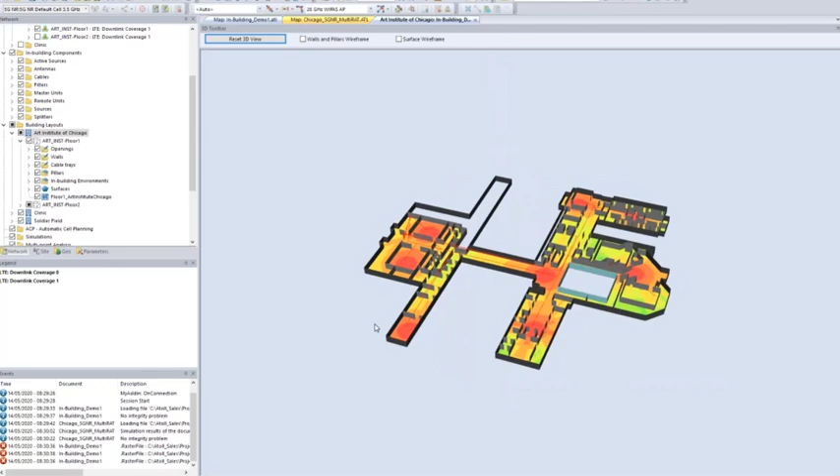That you would like to show and hide.

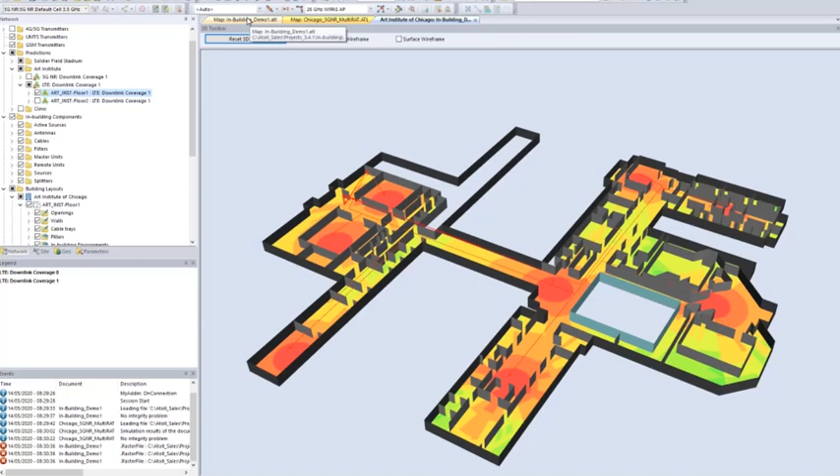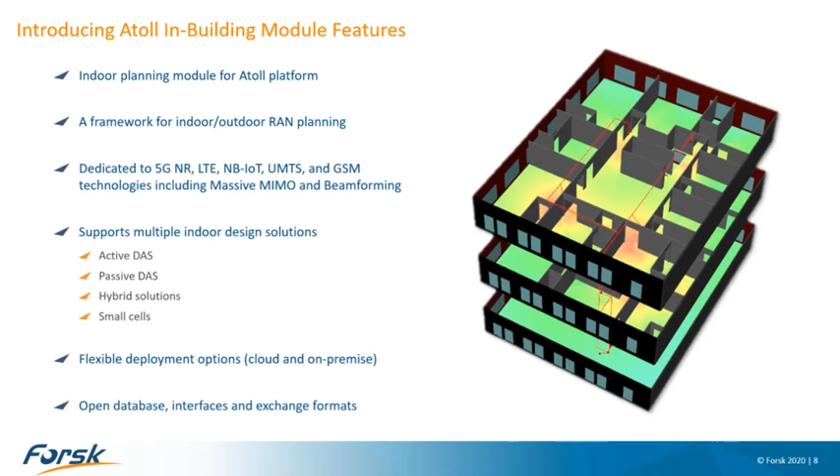When designing the indoor solutions, Atoll InBuilding helps you take into account real-life constraints such as propagation, the EMF exposure norms, the installation constraints, and many others.

As your project is taking shape, the Atoll InBuilding module will enable you to create reports and bill of materials.

So just to quickly show you an example, here I have this building with the doors. You take the coverage from the network, and then, as in this particular case, you can spot the areas where you have low coverage, and then start building your indoor solution.

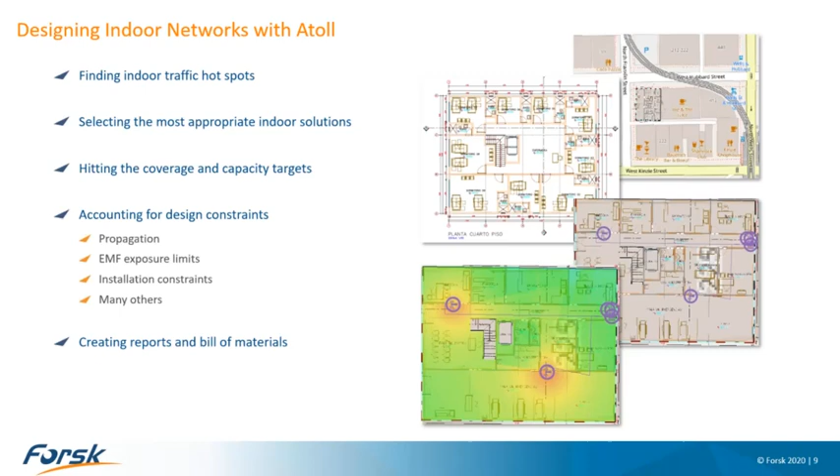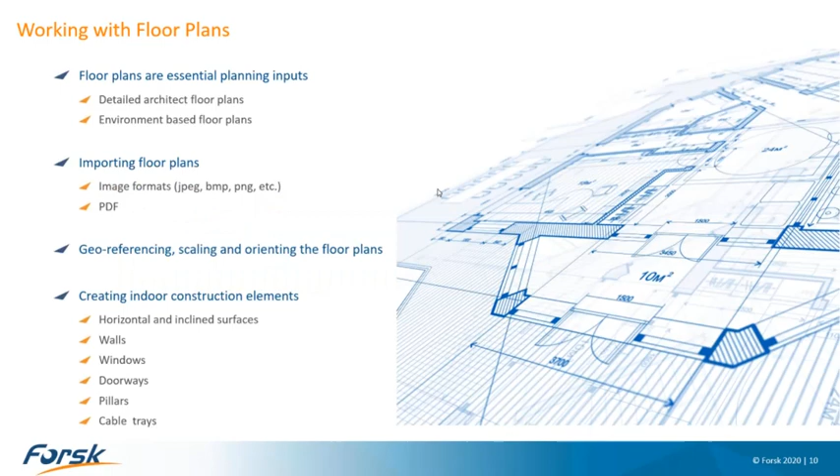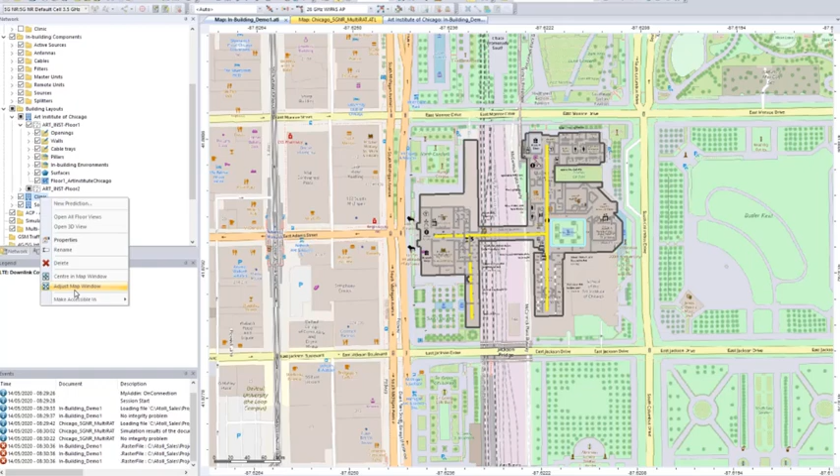Well, let me show you a quick example. I'm going to switch to a particular area. Here I have already a project, but let's do it on the neighbor building from scratch.

So what I'm going to do now is import this directly into the app. I just need to draw, then retrieve. As you can see, I have retrieved a particular building from OpenStreetMap.

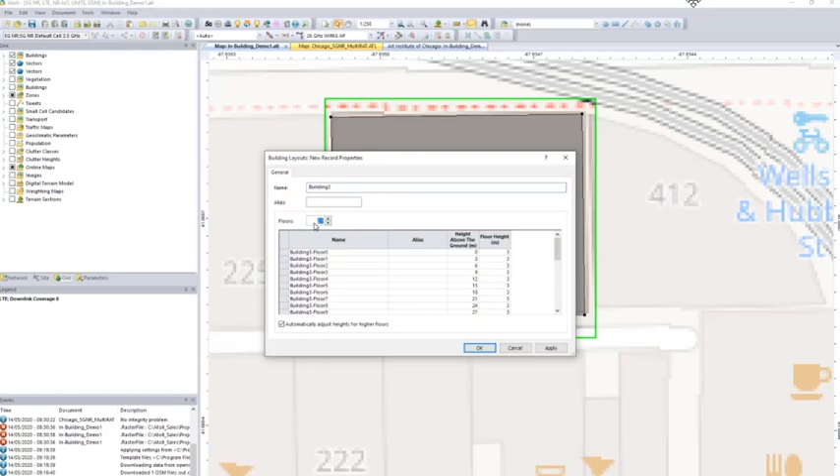What I can do is create my InBuilding project for this building. So now, under the building layouts folder, you'll find your building with all 3 floors, and you can start designing your in-building network.

So let's take floor 1. I'll open the floor view. Here now I can create walls, and I can create surfaces. Let's say I will create a surface for the floor, quickly, like that.

Okay, then what I need now is a floor plan. So let's import the floor plan. I add a plan, here, the floor plan. And I have the building shape, so I need to map the floor plan to this building shape.

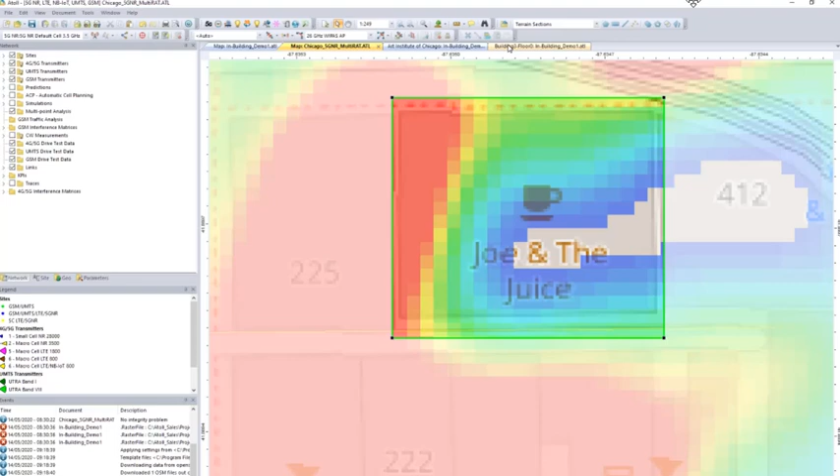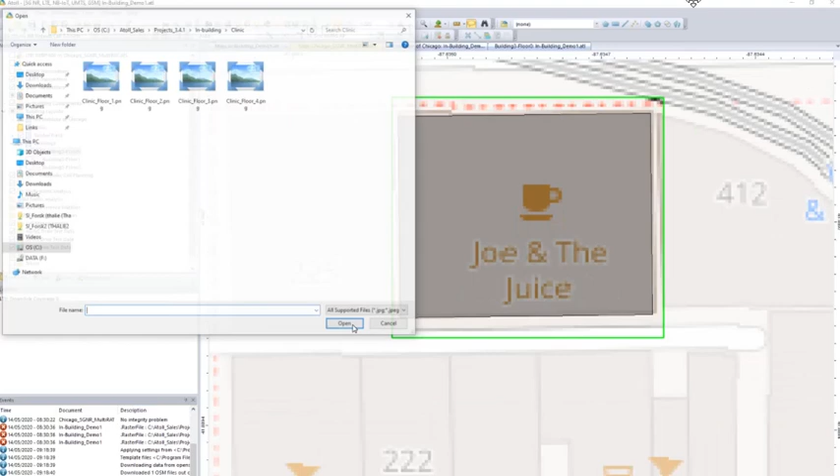Atoll will use this 3-point method to actually match the floor. So what I need is to select the corners that match the building. Sorry, that messed up my import a bit, so let me do it again. Second point, and the third one.

Okay, so now I have my floor plan, and I can start drawing the walls. Let's select a straight concrete wall and do it like that. Another one like that, another one like that, and let's draw some intermediary walls.

Now I can add some doors. Here I have a door, second, third, and let's add this one. I can also add a window, so let's add a window. Okay, so now I have my floor plan, and I can build my indoor solution.

After importing the floor plans, we need to plan our equipment. Atoll InBuilding supports passive, active, and auxiliary components. Passive components include antennas, cables, connectors, splitters, combiners, and other types of equipment, and you can even add your own type of equipment. Active components include master units, extension units, remote units, repeaters, and amplifiers.

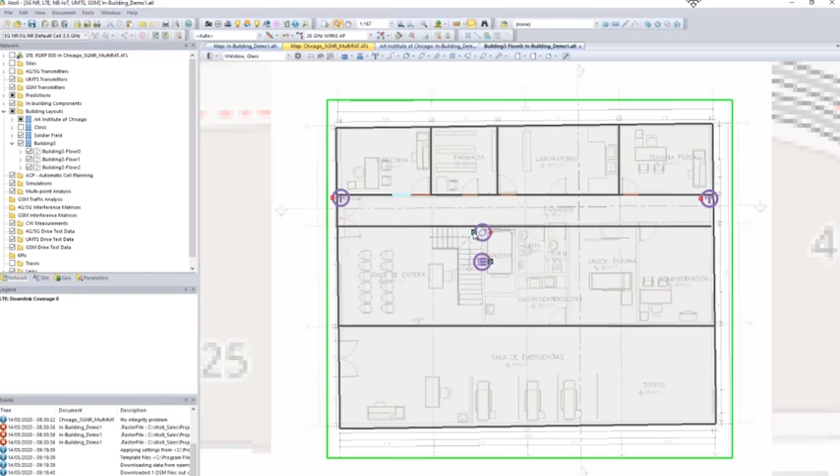So if we go back to our project, I can start building my network. Let's create a source, then I'll add a splitter, then add a couple of antennas, one here and one here. Now I just need to connect them: I'll connect my source to my splitter, and connect them to my antennas, and the second antenna. Okay, so here it is.

And now to make it neat, what I'm going to do is add a cable tray. Let's say I'll add a cable tray, and now I'll route automatically my connections, my cables, through the cable tray—first one, and then the second one.

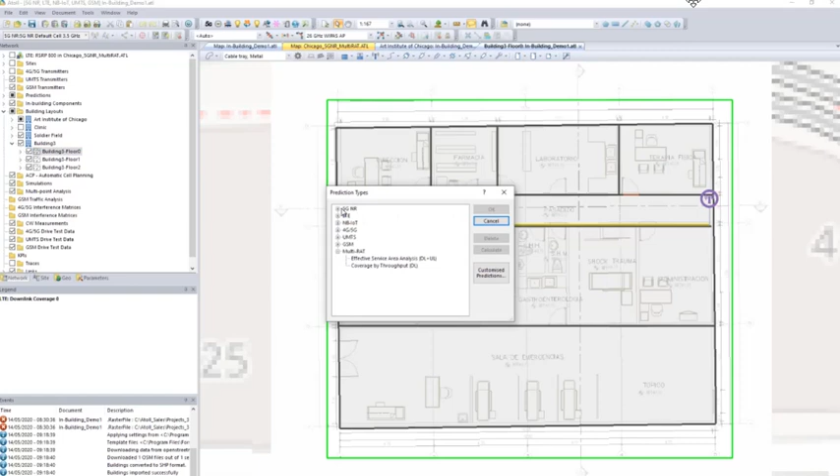So I've built my project, and what I can do now is make coverage calculations. Let's create a new prediction, take, let's say, downlink coverage, and then run the calculations. Okay, so with equipment installed, I have my coverage, and I can start studying my InBuilding project.

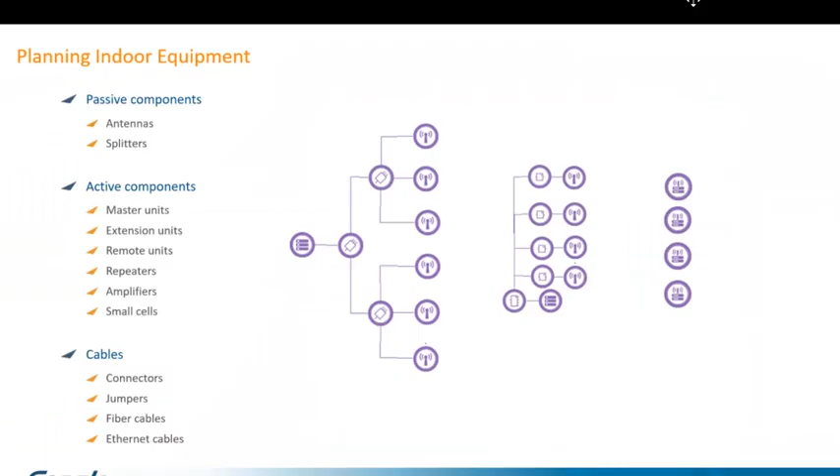Desire is to get the coverage right. To help you with this, we provide two types of propagation models. Both of them are ultra-high precision dedicated indoor propagation models, which feature cross-floor propagation.

The first one is ray tracing multi-wall propagation. It actually uses ray tracing techniques and can model reflections and through-wall losses. It also has the propagation characteristic of material type and automatic calibration using CW walk test data.

The ITU 1238 propagation model is an environment-based indoor model featuring user-definable losses. Propagation models, you find them in the Atoll propagation model library. So here you have the ITU-based propagation model. Here, for different frequencies, you can define propagation.

Let's look at the multi-wall model. So here, also frequency, wall and for other walls. You can also activate the ray tracing method propagation.

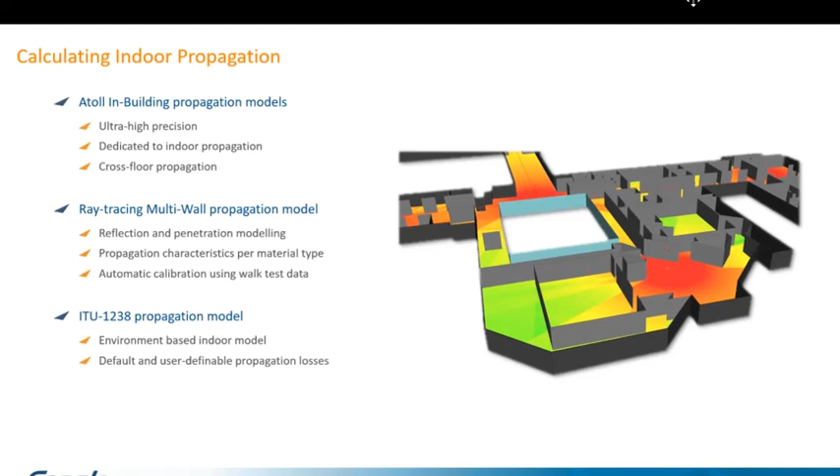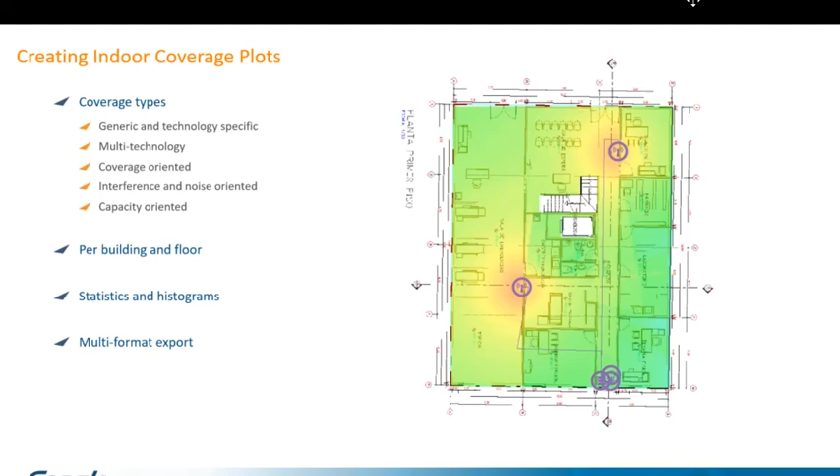Technology plots are provided by several technologies. Plots are grouped in coverage-oriented, interference. Plots can be created. You can run histograms, calculated plots, and the resulting plots can be exported to multi-format vector and raster files.

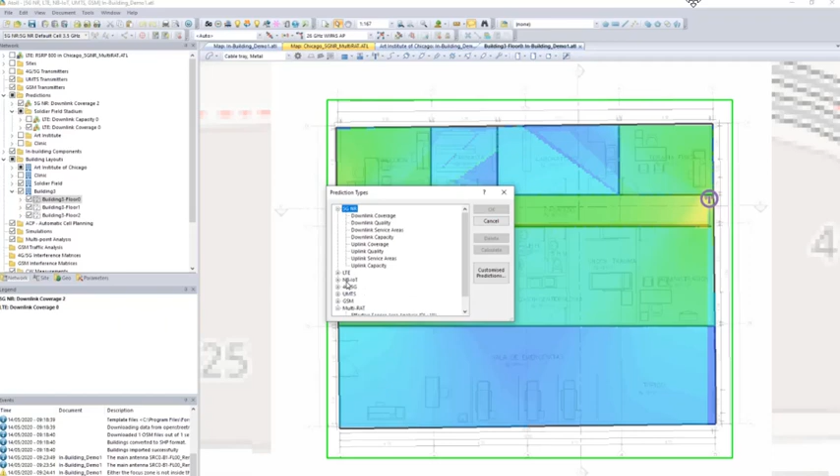Let me go back to Atoll. Here under the prediction folders, you see I have several examples. I have the coverage plot that we just created. When you create a new coverage plot, you add a new prediction, and here are all the technologies and different types of coverage plots, so coverage quality, service area, capacity.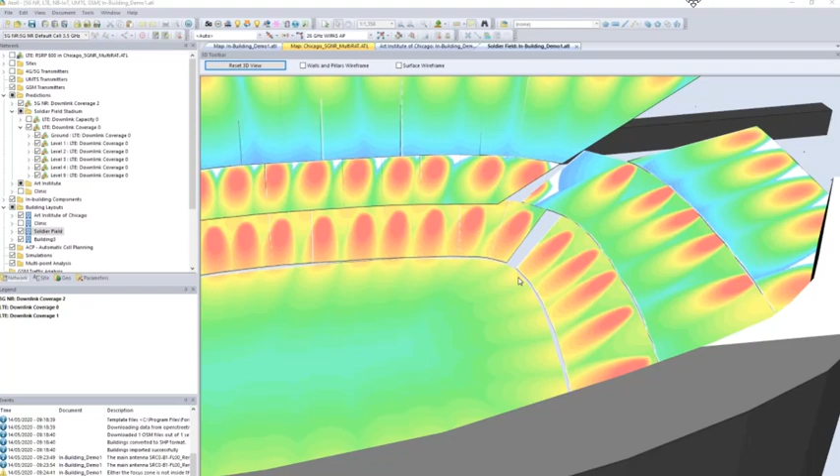So here you can see surfaces, and on these surfaces, the coverage.

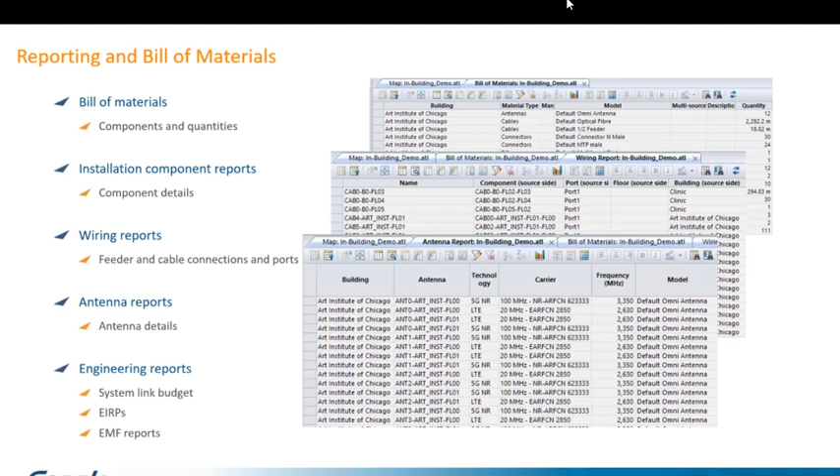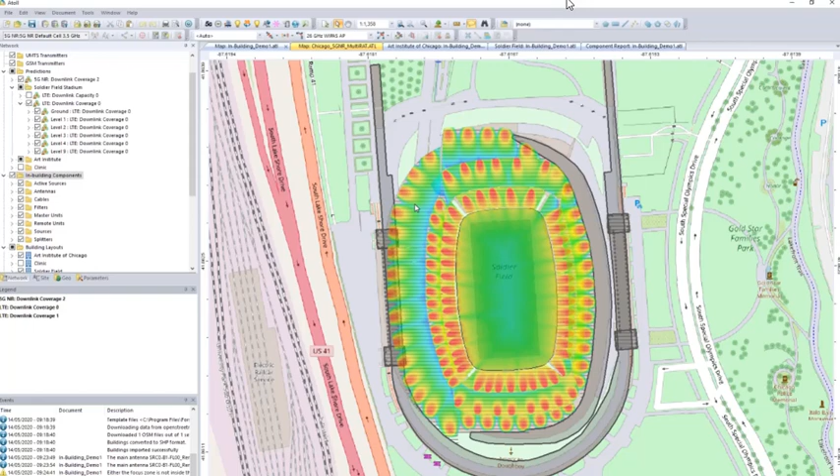Let's go to Atoll and show you. So here I have the InBuilding components. We can, for example, look at the component report. So here I have... let's focus on a specific one. We have all the information on the installed equipment.

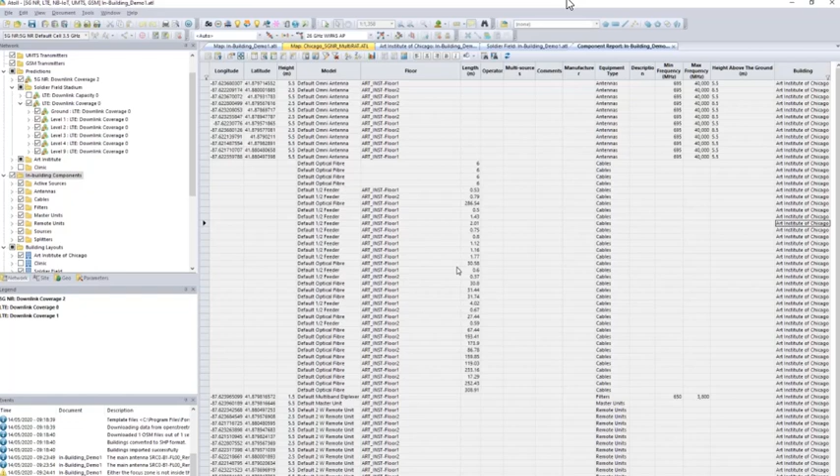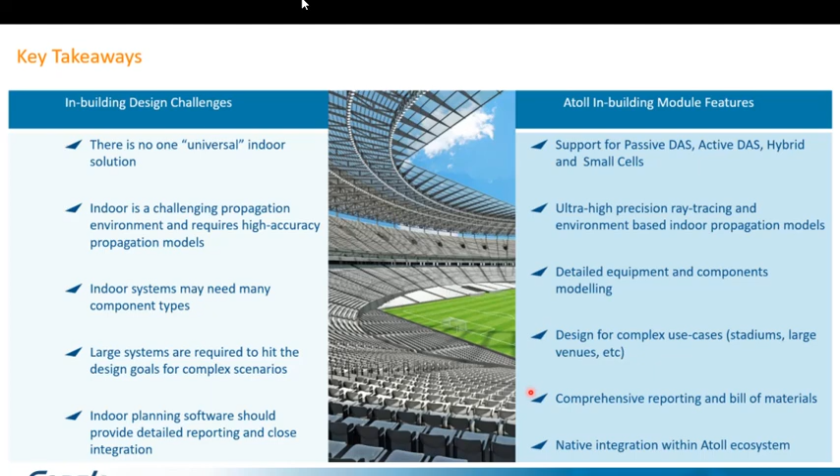We have actually received a lot of questions from email communications. Anyway, before answering these questions, we would like to make a quick poll among you just to better understand how you work with InBuildings. First question: do you use an InBuilding planning tool?